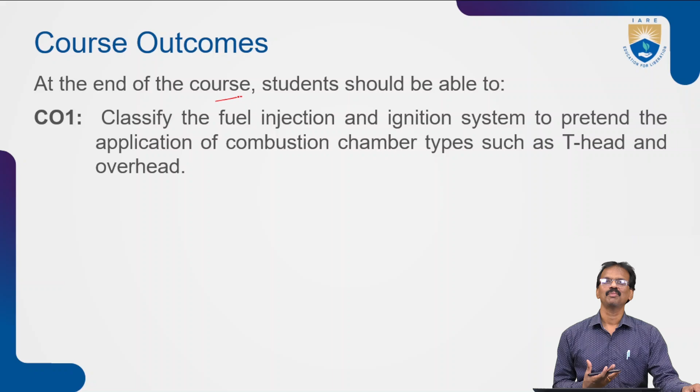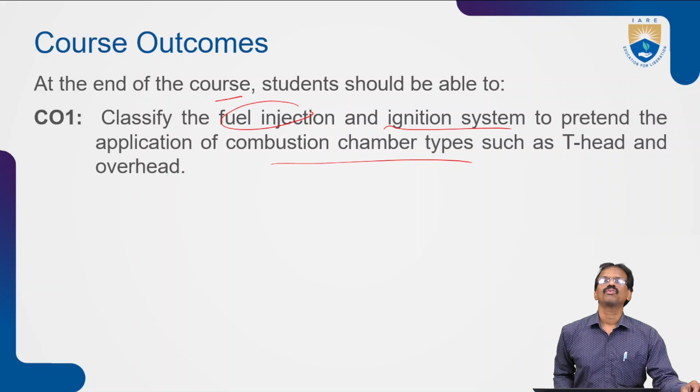I would like to explain about a new subject, thermal engineering and systems. First, we'll see what is important. Mainly, there are 6 course outcomes in the subject. The first one is related to unit 1, the introduction of IC engines. At the end of this course, students should be able to classify fuel injection types and ignition systems, and also the application of combustion chambers like T-head and overhead. So this is the course outcome related to unit 1 mainly. Now first we will see introduction of IC engines. You know that IC stands for internal combustion engines.

First we will see what is thermal engineering. Thermal engineering is a branch of science which deals with the study, design and application of systems and processes mainly involving heat transfer. We know heat transfer takes place in 3 modes, which we already learned in previous classes: conduction, convection, radiation. Thermodynamics is a very important subject, which we already learned in second year.

Next, energy conversion is the conversion of energy from one form into another, like conversion of chemical energy of the fuel into thermal energy. We'll see this conversion in IC engines. It plays a crucial role in various industries, such as power generation. Conversion of chemical energy, it means coal energy or petrol energy, fuel energy is converted into thermal energy, and thermal energy is converted into power generation.

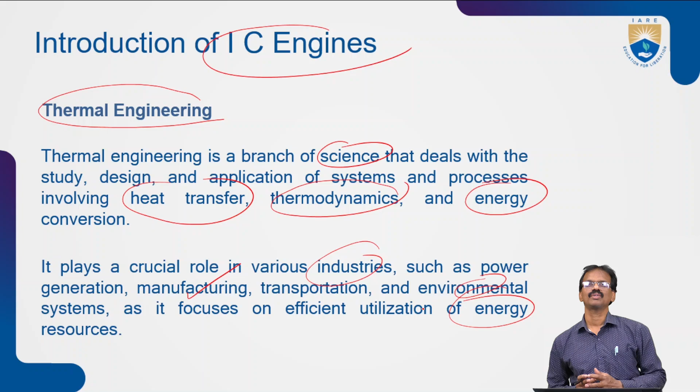Next is manufacturing, where we'll also use this thermal energy. For transportation, we use IC engines. IC engine is the heat engine related to thermal energy. Environmental systems also focus on efficient utilization of energy resources. This is just a brief introduction about thermal engineering.

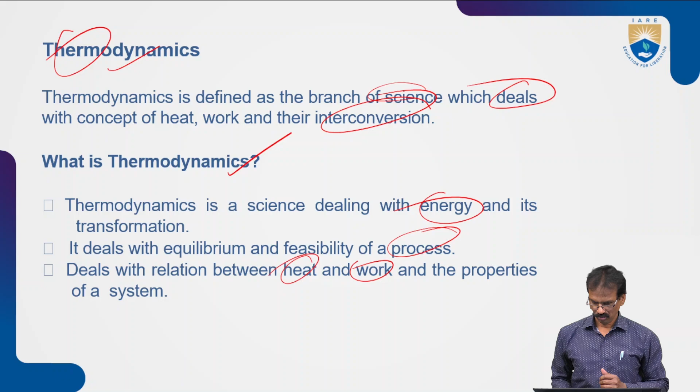You know that thermodynamics is related to heat and dynamics, so thermodynamics is the study of dynamical parameters relevant to heat. It is defined as the branch of science which deals with the concept of heat and work and the interconversion of heat to work and work to heat. Thermodynamics is the science dealing with energy and its transformation. It deals with equilibrium and feasibility of a process, and also the relationship between heat, work, and the properties of the system. So first we'll see heat engine.

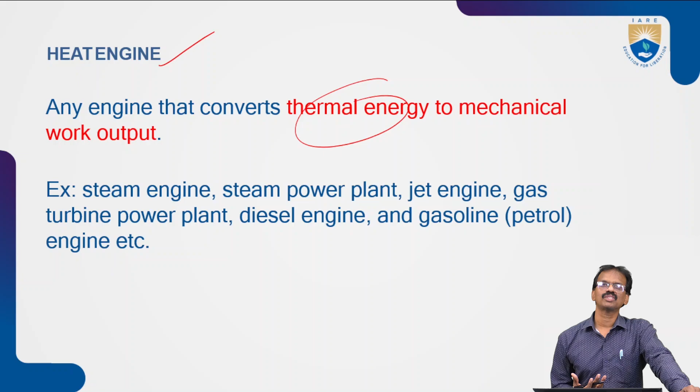IC engine is nothing but a heat engine. We'll see what a heat engine is. A heat engine is the engine that converts thermal energy into mechanical work output. So by using thermal energy, mechanical work is carried out. Many examples are there, like steam engines, steam power plants, and many types of power plants, jet engines, gas turbine power plants, diesel engines and petrol engines. These are the examples of heat engines.

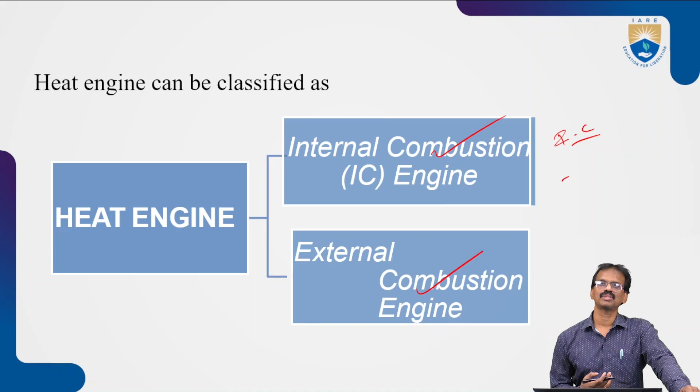Now we'll see heat engines, which are mainly of 2 types: one is IC engines, internal combustion engines, and the next is external combustion engines. So we'll see what is internal combustion and what is external combustion. Internal combustion is where the combustion takes place inside the cylinder. We know many examples like IC petrol engine, diesel engine; these are the main examples of internal combustion.

So this is the cylinder. Combustion takes place in this cylinder, which gives high power, meaning high heat and high pressure. That high pressure and high heat thrust or push this piston in the downward direction. In this way, the piston moves in reciprocating motion, upward and downward. This reciprocating motion is converted into rotary motion of the engine to work any machinery. So IC engine mainly means internal combustion, where combustion takes place inside the cylinder. That is the IC engine.

But in case of external combustion, the working fluid gets energy from outside through some heat exchangers, just like boilers. It means combustion takes place outside of the cylinder, not inside. The working fluid gets energy from outside; through boilers, water is heated and converted into steam. That steam is used to run the piston, or the reciprocating motion of the piston. So if combustion takes place inside the cylinder, that is simply called internal combustion.

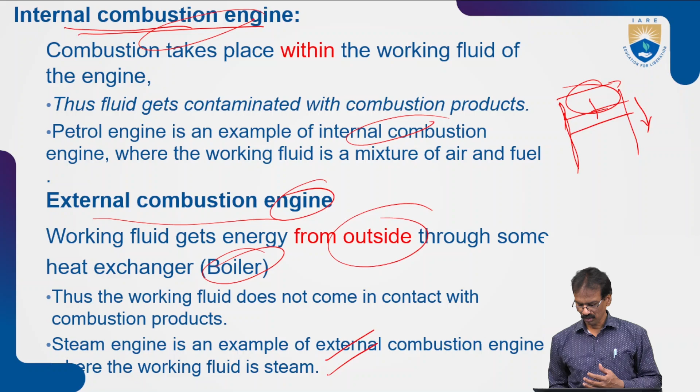For national thermal power plants, we use this one, and locomotive engines also. So we'll see a few examples of internal combustion engines, and next, external combustion engines also.

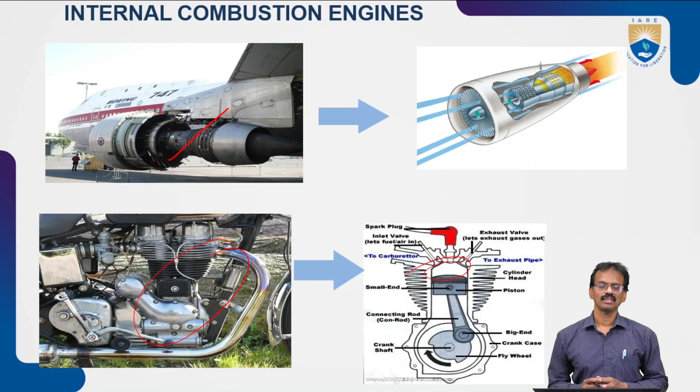These are examples of external combustion engines, where combustion takes place outside the cylinder. The steam is applied to the movement of the piston in the cylinder. The high pressure steam moves the piston, and this steam is taken from outside the cylinder, with the help of boilers. So here, conversion of steam occurs by the combustion process, and this combustion takes place outside the cylinder.

But in IC engines, combustion takes place inside the cylinder. These are the examples for external combustion engines, like steam engines and national thermal power plants. Here also, steam is prepared outside the cylinder, and that steam is used to run the turbines or the movement of the piston.

Next, classifications of IC engines. There are many types of classifications of IC engines, but we will see mainly according to our syllabus, the first unit, which relates only to IC engines, not external combustion engines. Internal combustion engines have many more features compared to external combustion engines, because internal combustion engines require only less space.

Compared to external combustion engines, IC engines are compact in size, give good efficiency, and give good power also. So internal combustion engines have replaced external combustion engines. Nowadays, mainly internal combustion engines are rapidly being used instead of external combustion engines.

So we'll see the classifications of IC engines. There are many types. First, according to number of strokes, there are mainly two types: the four-stroke engine and the two-stroke engine. Based upon the type of stroke, we'll see what is a stroke, and what are four-stroke and two-stroke engines, later I will explain.

Next, according to the use of fuel also. Based upon the fuel, if we use petrol, that is called petrol engine. If we use diesel as fuel, that is called diesel engine. If we use gas as fuel, that is the gas engine. So based upon the type of fuel used for combustion, these IC engines can be classified into three types: petrol engine, diesel engine, gas engine.

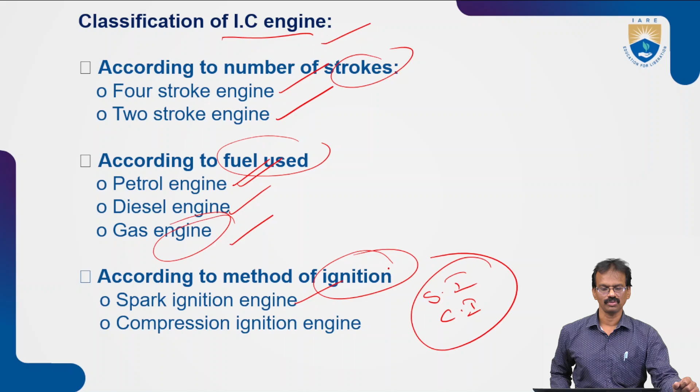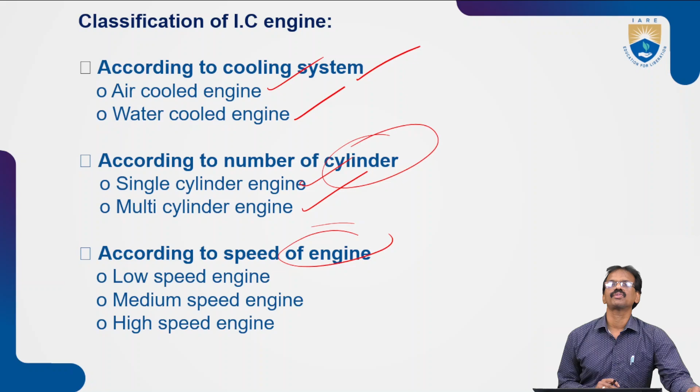According to speed of engines, there are low speed engines, medium speed engines, and high speed engines. These are the different types of IC engine classifications we can see.

Now we'll see internal combustion engines based upon the ignition system, as discussed in the previous slide. Based upon the ignition system, IC engines are classified into two types: spark ignition and compression ignition. In spark ignition, ignition occurs by the spark plug to ignite the air-fuel mixture. Here the fuel is petrol, so simply we can call spark ignition engine as gasoline or petrol engine.

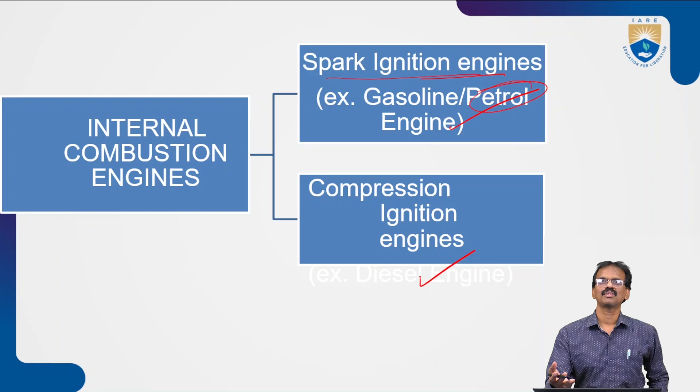Next is the compression ignition engine. Here, ignition occurs with the help of compression of the air-fuel mixture by the piston, and this mainly occurs in diesel engines. So spark ignition is nothing but petrol engine, and CI engine is nothing but diesel engine. We can classify them like that. We'll see first of all what is the spark ignition engine.

Spark ignition engine is an engine in which the combustion process in each cycle is started by an external spark. It means, suppose this is the cylinder, this one is the inlet manifold, this one is the cylinder, this is the piston, top dead center TDC, and BDC bottom dead center.

First, the air fuel mixture is taken into the inlet hole through the inlet valve. This is the exhaust manifold for exhausting smoke and other gases. Here we use a spark plug for igniting this fuel, so combustion takes place with the help of an external spark. For giving that external spark, we use a spark ignition system.

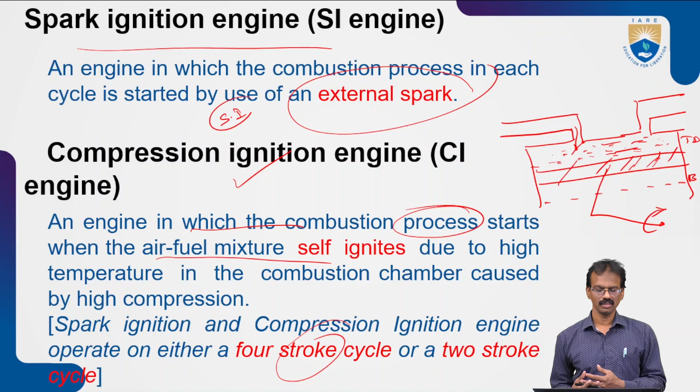Spark ignition and compression ignition engines operate as either 4-stroke or 2-stroke engines. Spark ignition engines can be either 2-stroke or 4-stroke, while compression ignition CI engines are mainly 4-stroke. So these are the classifications.

We know that in a 4-stroke engine, the power cycle is completed mainly in 4 strokes: intake or suction, compression stroke, power stroke or expansion stroke, and finally the exhaust stroke. So there are 4 types of strokes.

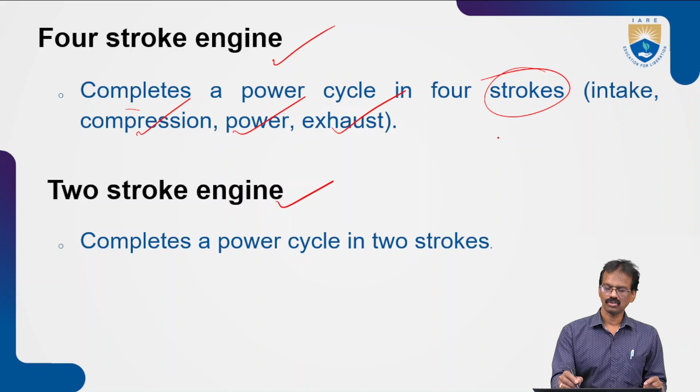These 4 strokes are completed in 2 revolutions of the flywheel, or 2 cycles. From top dead center to bottom dead center is the suction stroke. This is the TDC, this is the BDC. Bottom to top is like compression, then expansion, and then expansion to exhaust is the fourth stroke. So the total power cycle is completed in 2 revolutions of the flywheel, or 2 cycles.

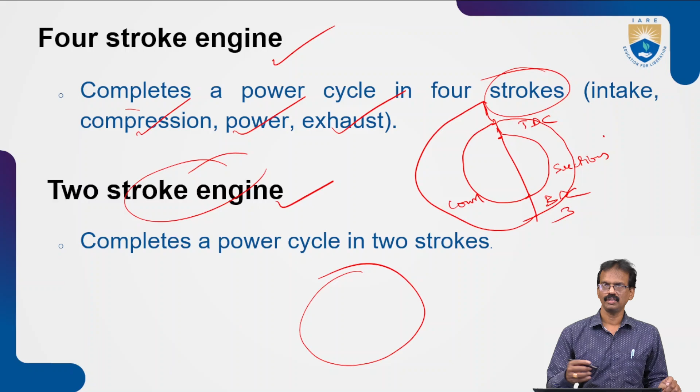But in a 2-stroke engine, the total power cycle is completed in only 1 cycle or 1 revolution of the flywheel, meaning only 360 degrees, compared to 360 plus 360 degrees, or 720 degrees, for the 4-stroke engine.

Now we'll see some advantages of IC engines: high power to weight ratio, giving good power and high efficiency; portable and compact design, since combustion takes place inside the cylinder requiring less space compared to external combustion engines; and greater efficiency compared to external combustion engines.

We know the applications of IC engines are mainly in automobile sectors like cars, motorcycles, trucks, and in marine engineering for boats and ships, aircraft mainly, and in some cases industrial machinery and power generation will also use this type of IC engine.

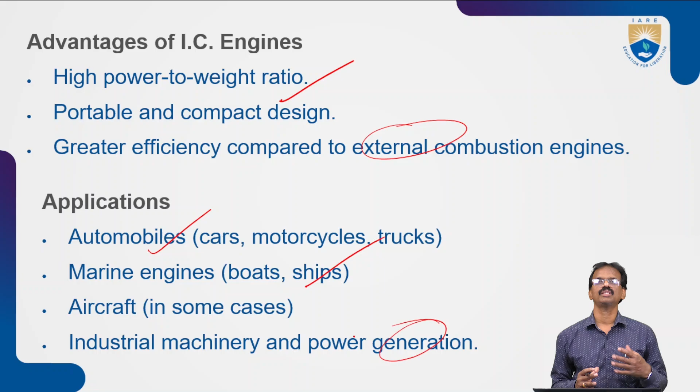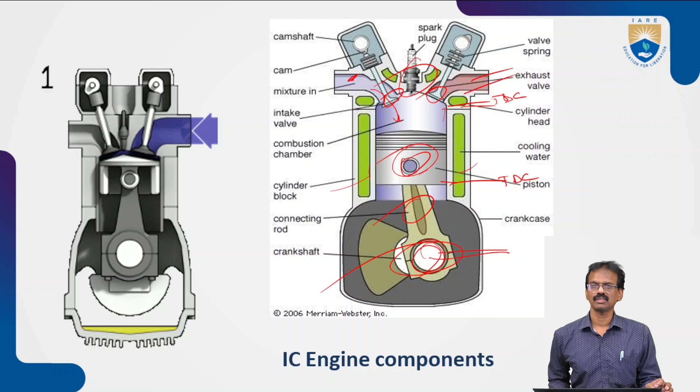In this way, the reciprocating motion is converted into rotary motion of the shaft by the crankshaft. This rotary motion drives the engine, and with its help, other motors and components will work automatically. So this is the block diagram of an IC engine and its components.

We will see the explanation regarding the different parts of IC engines in the next class.